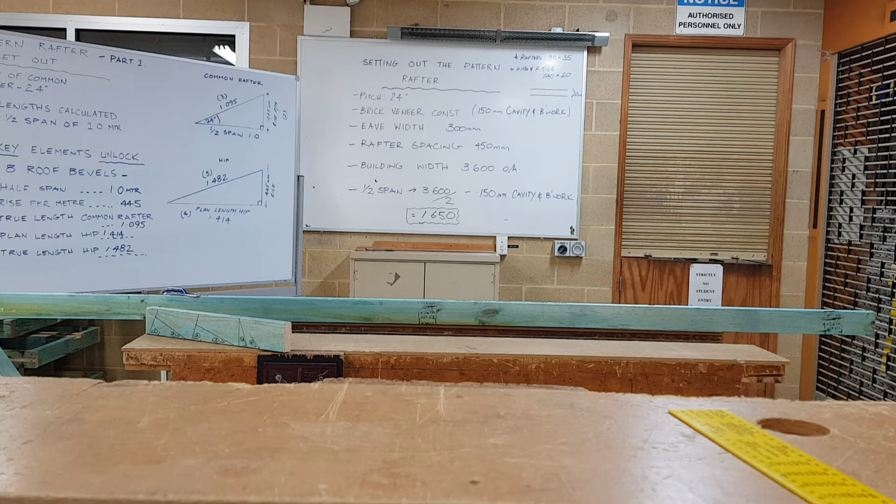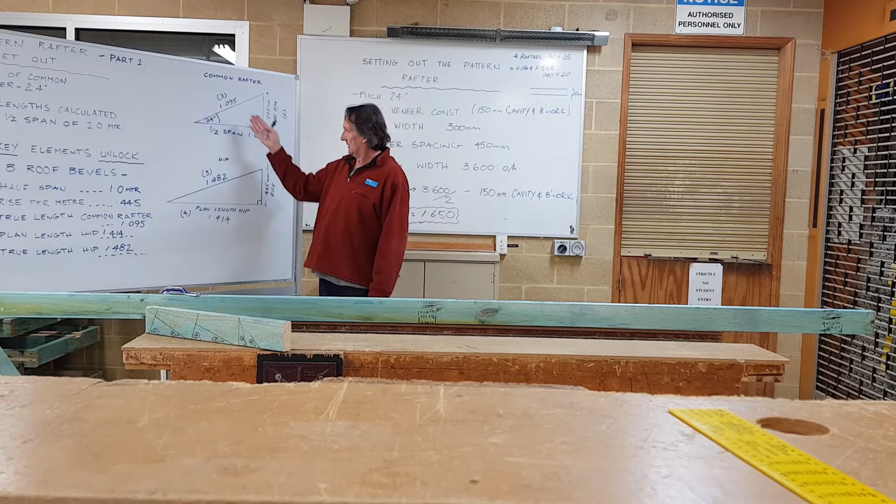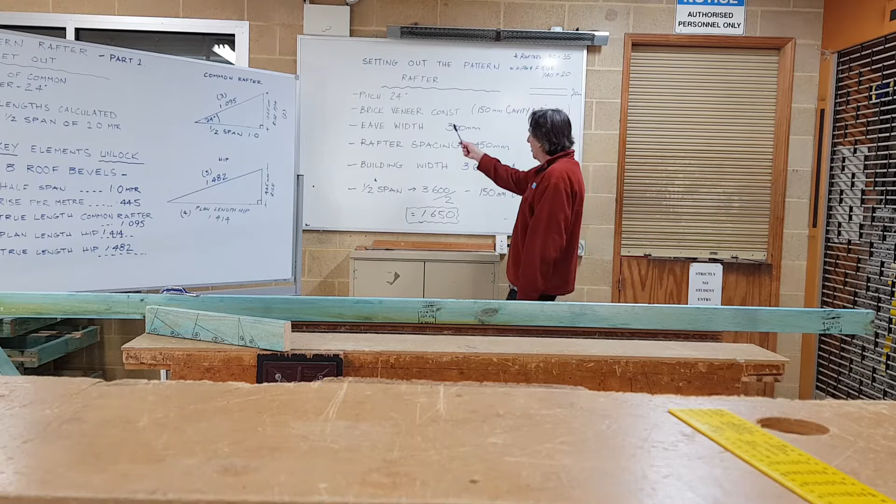We're going to set out the pattern rafter this time, based on our original specification with the 5 key elements, which gave us the 8 bevels. It also gives us the key lengths so that we can actually work out the set out for the pattern rafter. We're going to do it to the specification you can see behind me on the whiteboard. We're going to work to the pitch of 24 degrees as per our original set out.

We're going to deal with brick veneer construction. As you know, that's a 40mm cavity and 110mm brickwork sitting outside the frame. We're going to have an eave width of 300mm. That will be from the outside face of brickwork to the outside of the fascia. We're going to have a rafter spacing of 450. Overall building width, outside face of brickwork to outside face of brickwork, 3.6.

We need to work out the half span in order to start setting out that pattern rafter. So it's going to be the full building width, 3.6 divided by 2, 1800. 1800 less one cavity and brickwork on one side, 150, gives us a half span of 1650 to work this pattern rafter out to. That's what we're going to base it around.

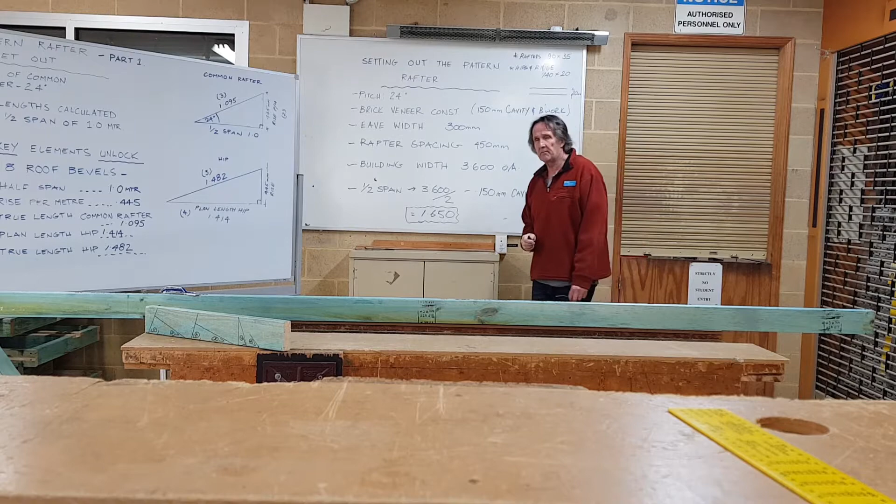We're going to be dealing with rafters in a size of 90 by 35, so our centering rafters, our crown end rafter, any creeper rafters, commons, anything of that nature are all going to be 90 by 35. The hips and ridge, going to make them 140 by 20, just for the purpose of the exercise. They can be anything, of course, but that's what we're going to work to. So you can see here, we've got a pattern rafter, we've got a blank set up, bit of 90 by 35 treated. We've got the bevel block here.

The first thing I'm going to do on the pattern rafter is make sure I'm setting off the spring, the bow up, if you like, in the timber. I'm going to use the bevel block that we set out, and I'm going to come up with plumb bevel common rafter. I'm going to set the bevel to that. Plumb bevel common rafter, there it is. I'm going to come to the end of the timber. I'm going to use a Sharpie to mark this. Right on the end of the timber, from the top corner down, I'm going to show the centre line.

Whenever I do centre line, I put a CL through it because that indicates that it is the centre line detail construction with no members deducted off it. Not half the ridge thickness, not half the centering rafter, nothing yet. That's the centre line location. From that, we want to show the common rafter cut. The common rafter cut would be half the ridge thickness on each pair of rafters on either side of the roof. We can see that the ridge and hip is 20mm thick, so I want to take 10mm off this pattern rafter, and that of course will mean every pair has 10mm off it, allowing for the 20mm thickness.

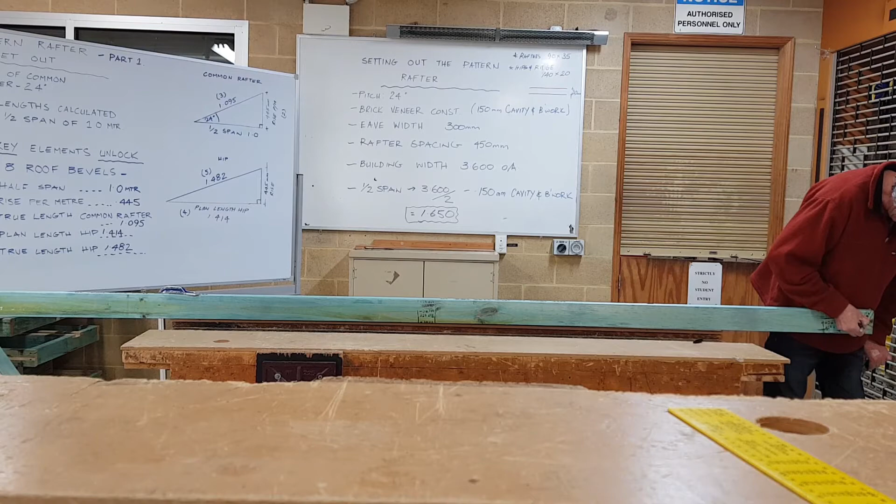So when I measure this, I don't measure it along the gradient or the slope of the roof. I have to measure it square from my original plumb line. So I'm going to go half the ridge thickness, 10mm. I'm going to put my bevel back on there. I'm going to mark that line. I'm going to call that plumb bevel PB common rafter, CR. I'm going to square that line across the top edge.

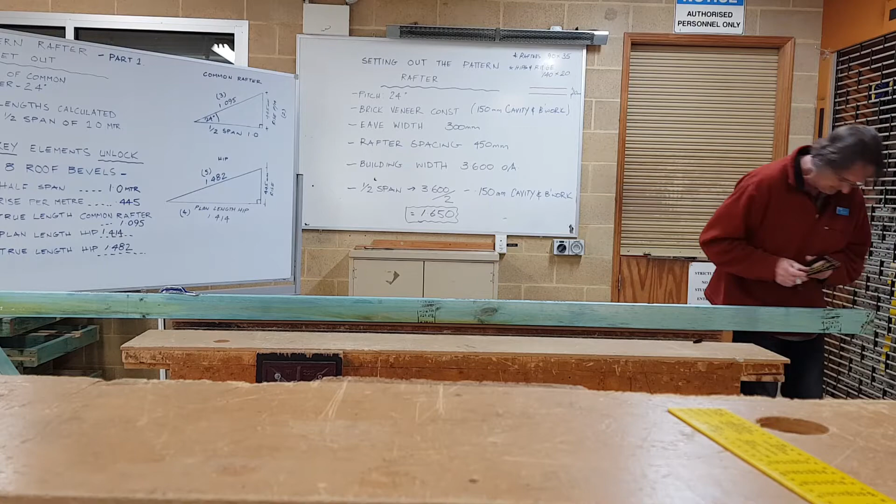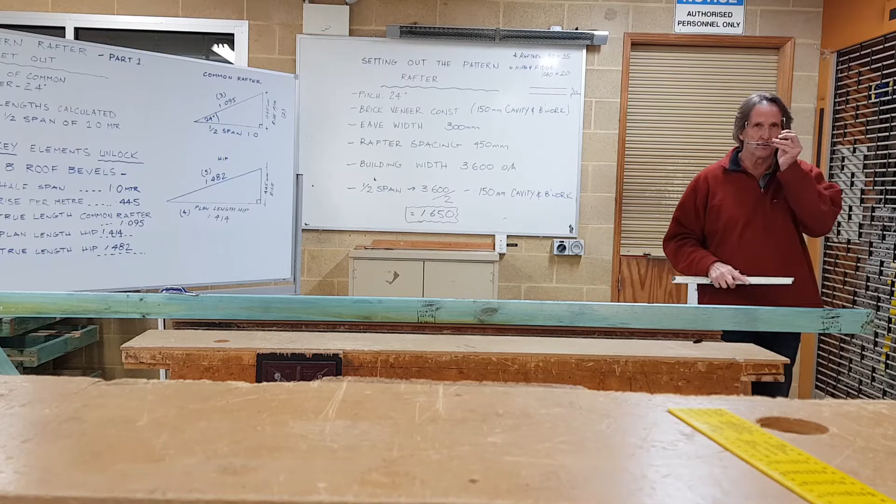Fantastic. I now also want to show the plumb cut for the crown end rafter in the hip roof. Well, the crown end rafter butts to the end of the ridge on the half span, and it is a deduction of half the thickness of the centering rafters, because we're all working to centre line. So half the thickness of the centering rafters, as all rafters are 35mm, 17.5mm need to come off the centre line to show the plumb cut for the crown end rafter, that rafter that braces the roof. So again, measuring from the centre line, back square, I'm going to take 17.5mm off.

10, 15, 16, 17, there it is. I'm going to plumb that line down. We know when I mark that on there now, that line is the centering rafter, C-E-R. Pardon me, crown end rafter, C-E-R. Easy to get confused between your centerings and your crown end as I think about it. That one is your crown end rafter. There it is. We square that across the top.

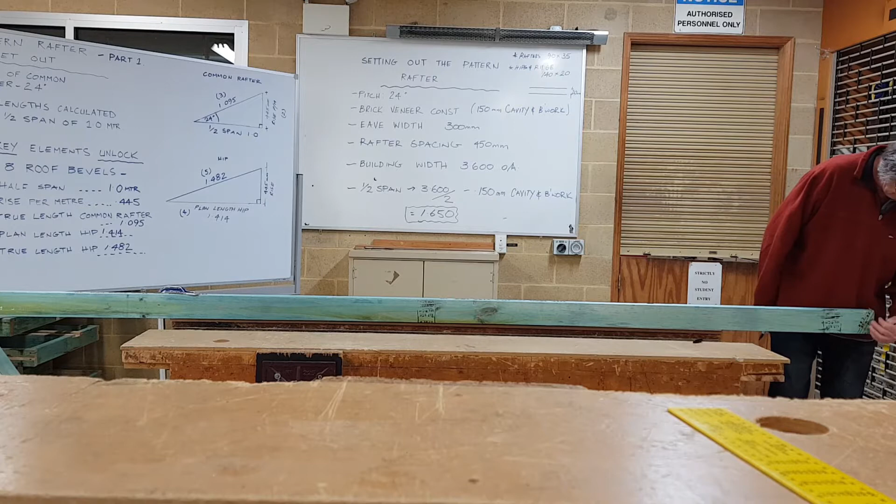Now we have the three key set out points for the pattern rafter. We've got the centerline detail, we've got the plumb cut for the centering rafters, and we've got the plumb cut for the crown end rafter. All clearly shown. What I need to do now is show the location of the set out length for the bird's mouth on this pattern rafter. So that's what I'm going to do next. And that's really very, very simple.

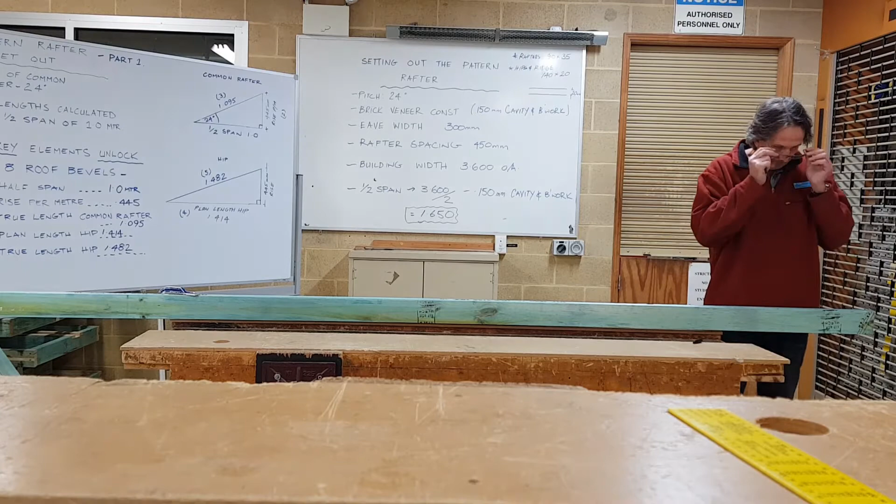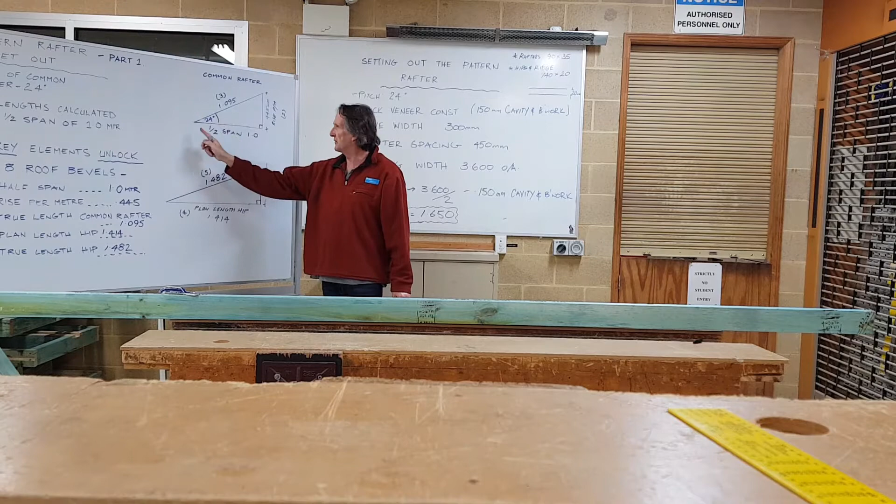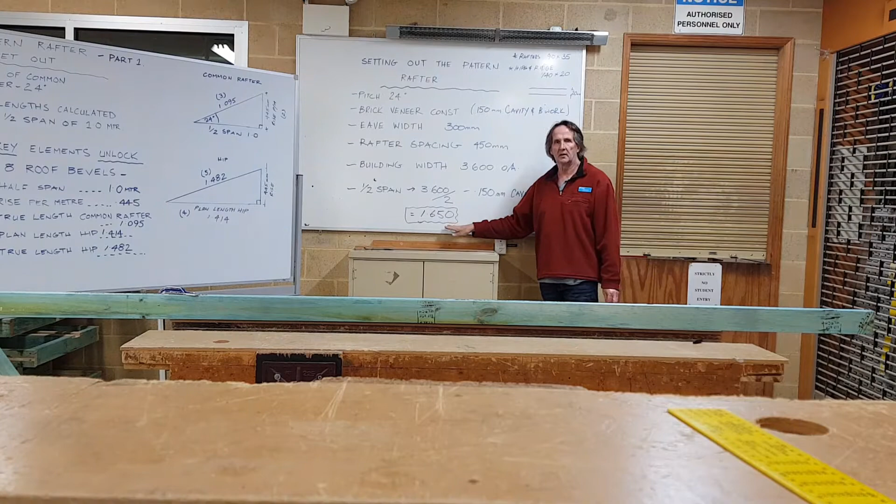Because we originally worked out that our true length per metre was 1.095 metre on a 24-degree pitch for every metre of run in the half span. Well, I know my half span is 1650. That's what we worked out a moment ago. So if I multiply my flat half span of 1650 by the measurement per metre of 1.095 metre, that will give me a direct measurement down the pattern rafter to the upstand or location of the bird's mouth.

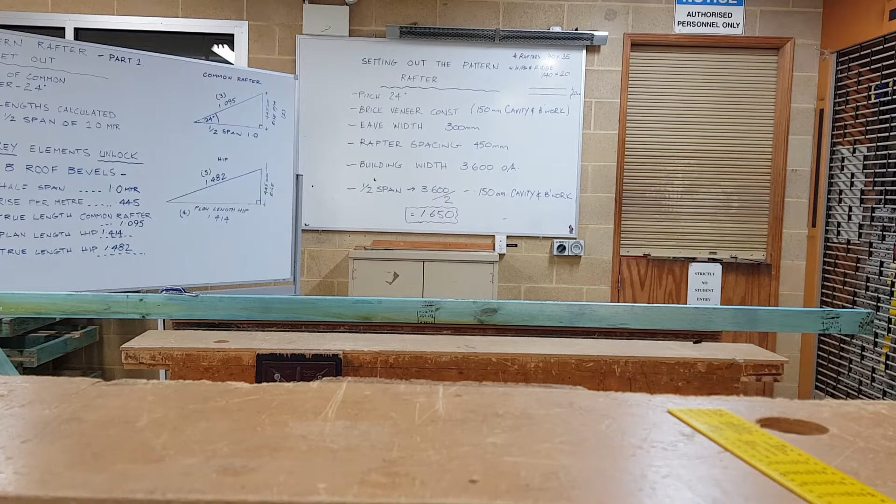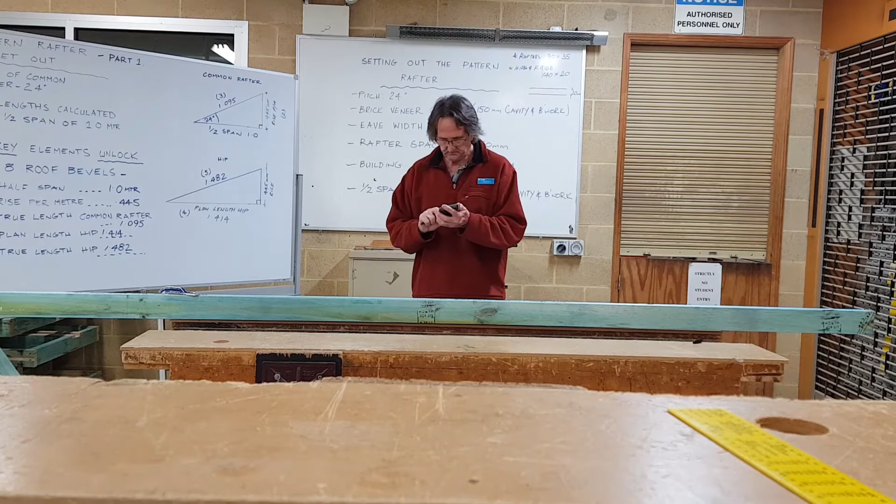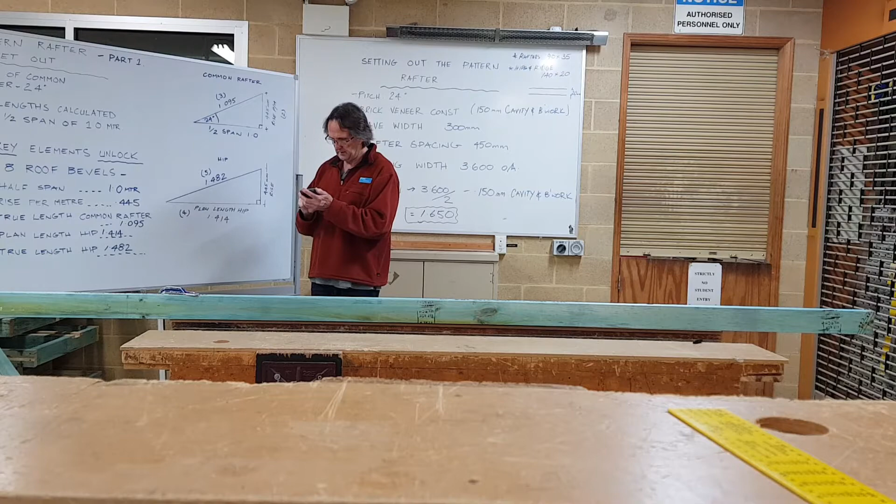So as I said, the half span, 1.650, multiplied by our true length of common rafter per metre on a 24-degree pitch, times 1.095, equals 1.807 metre. 1.807 metre. So I can hook my tape on the end of the timber, because that's where I set the centre line up from, and I can measure down that rafter 1.807 metre, and I can put a mark there, a little mark on the top of the timber.

On that mark, I'm going to put my 24-degree plumb line. I'm just going to check again on the bevel block, it hasn't moved. Yep, pretty good. Whoop, it's a bit too long, it's hitting the bench. Just slide it back up, recheck it again. Put it on my mark of 1.807 metre and draw a line in there. That represents the location of the outside of the frame on the half span.

Now I need to show the bird's mouth. The key thing about the bird's mouth is to measure the remaining amount of material left on once you've made the bird's mouth cut. It's called the upstand. On a 90 by 35 or a 90 by 45, something like that, a 75 to 80 mil upstand is the right size. I measure from the top of the rafter down the amount of material left on. The amount on the upstand is the important part.

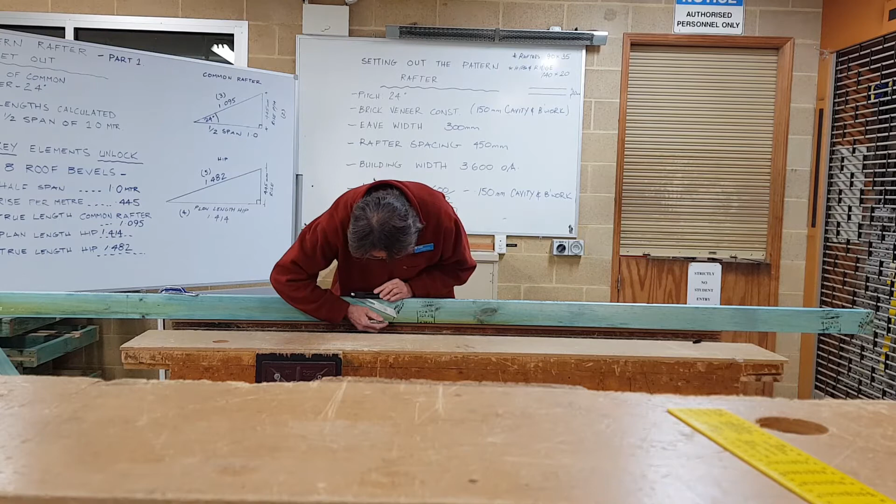So I'll put my bevel on there, I'll swing it around and set it for the angle of the level bevel. Here we go. Put it on, top edge, line it up down there, carry that distance through... of bird's mouth. Key part being the upstand is left on. That's fantastic.

So, bit of a revision. What have we got so far? We've got the centre line plumb cut. We've got the half ridge reduction of 10 millimetres, and then we've plumbed that down for the plumb bevel centering rafter. From the centre line, we've also marked half the thickness of a common rafter, or the centering rafter, for the crown end. 17.5 mil, we've marked that. We've squared those two across the edge of the timber.

Then we've said, okay, now we need the centre line set out length to the upstand bird's mouth, so we can make that cut as accurately as possible. So we've taken the half span of the job, 1650.

Once we've taken our 150 millimetres off half the overall width, and we've multiplied that length by our true length per metre, 1.095 multiplied by the half span, that gave us 1 metre 807. I've then hooked a tape on, 1 metre 807. I've laid it across the top on the pump up.

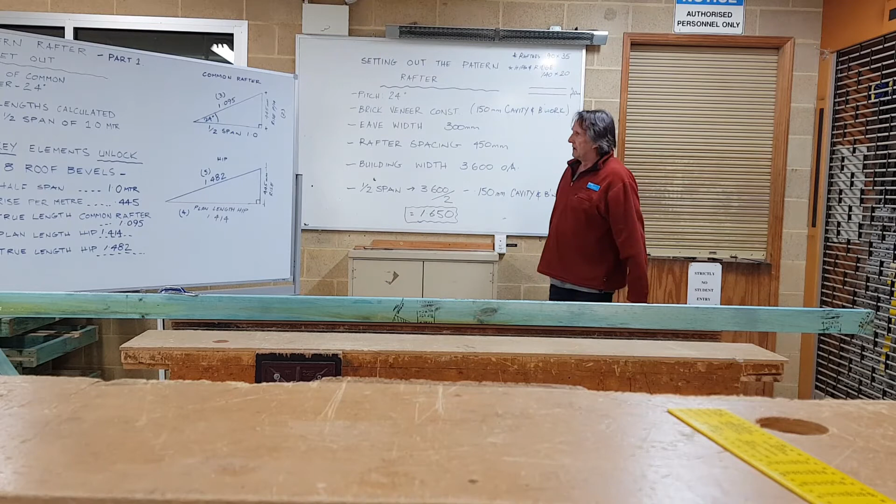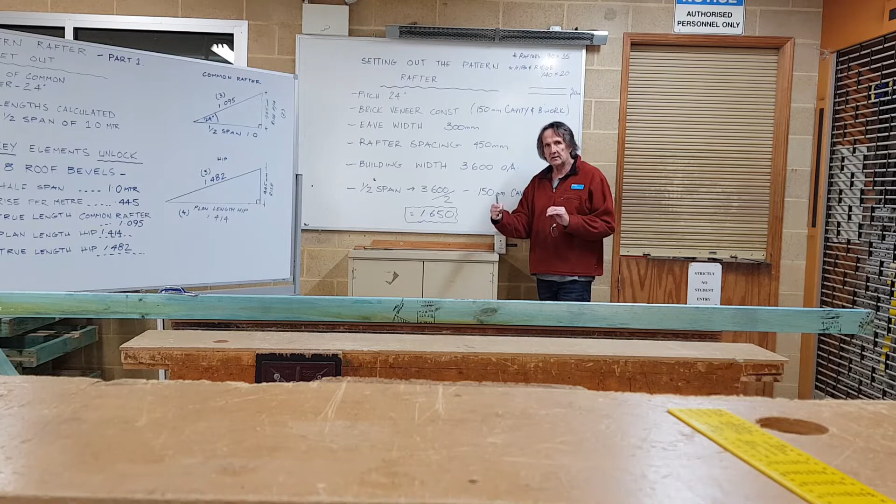I can take my 1650, which is from the apex point to the bird's mouth. I can then add the 300 horizontal eave overhang plus the cavity in the brickwork back on, because the upstand of 1650 is only to the bird's mouth, the half span. I can add it back on and then multiply that by the true length per metre to give me the length of the eave cut. So I might do that just to make it simple.

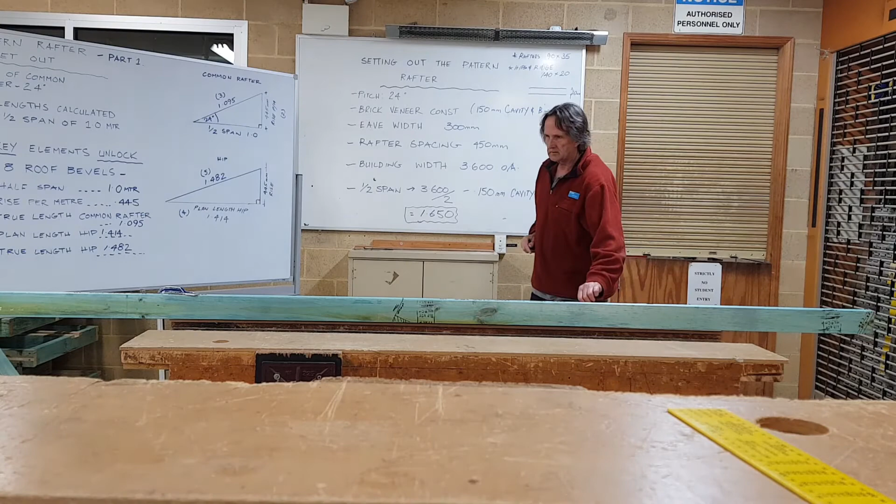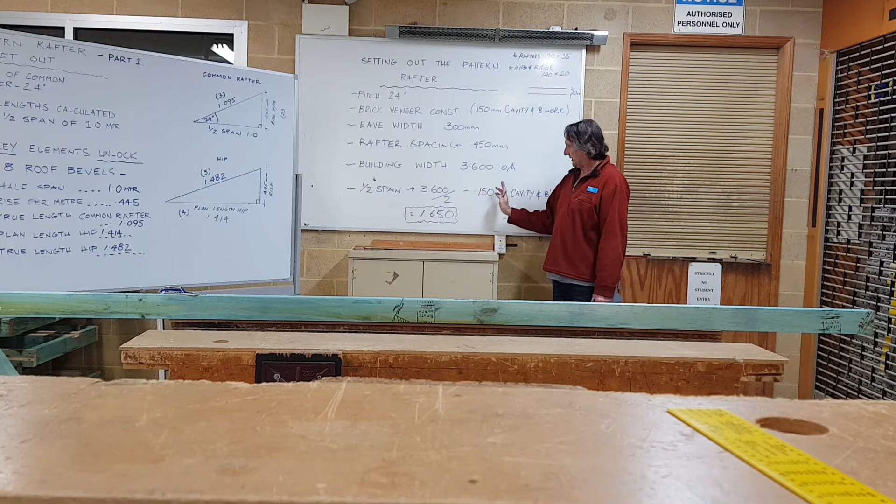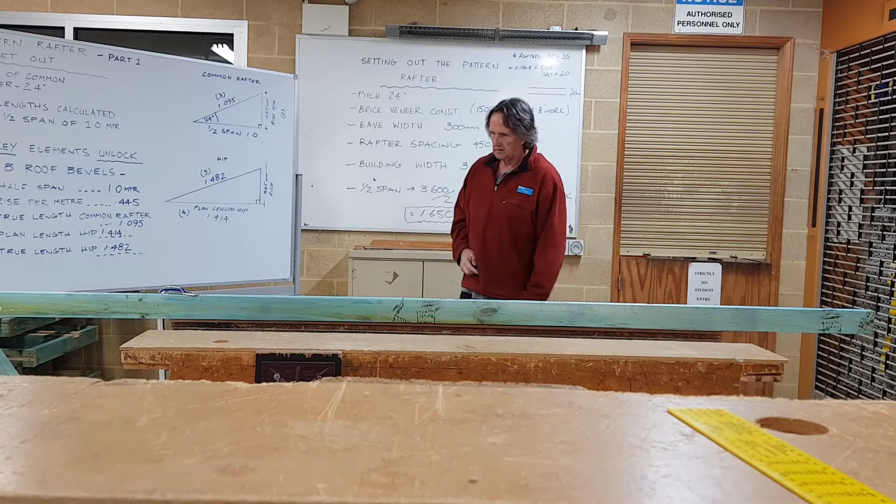The half span, 1650, I'm going to add the 300 eave overhang back on, 1950, and I'm also going to add on the 40 mil cavity and the 110 brickwork, giving us another 150 mil to give us 2 metres 100. Cool. 2 metres 100 is the plan length, 2 metres 100 multiplied by the true length per metre, 1.095, equals 2 metres 300 on the pump up length, 2 metres 300 centre line.

So I can put my tape on, I can go 2 metres 300, I can put a mark there, I can go back to my bevel block, I can get the plumb bevel again off my bevel block. That would be the plumb cut for the eave overhang. And then I need to take 20 mil off that for the fascia, because remember, the eave overhang is 300 to the front edge of the fascia.

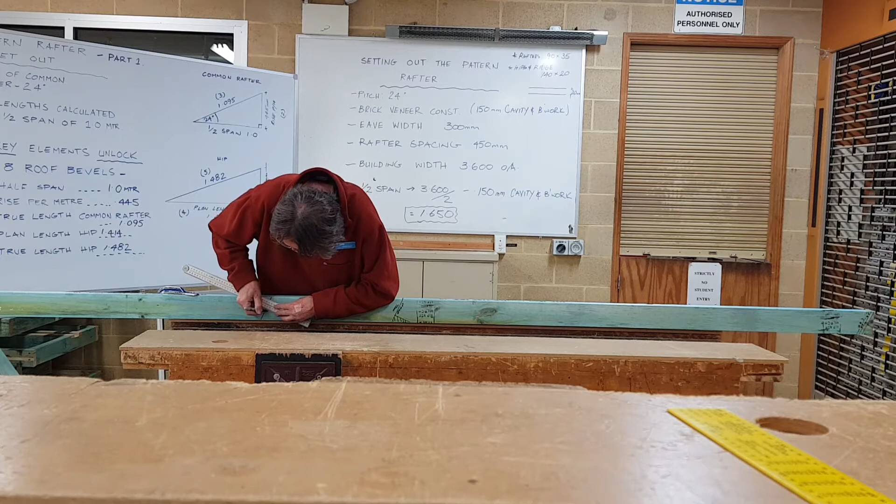So measuring 20 mil square off that mark and popping my bevel back on, I can actually indicate the tail eave cut. There it is. Square that across the top. And of course I can check that. And the easy way to check that I've got that correct is that I know the eave is 300.

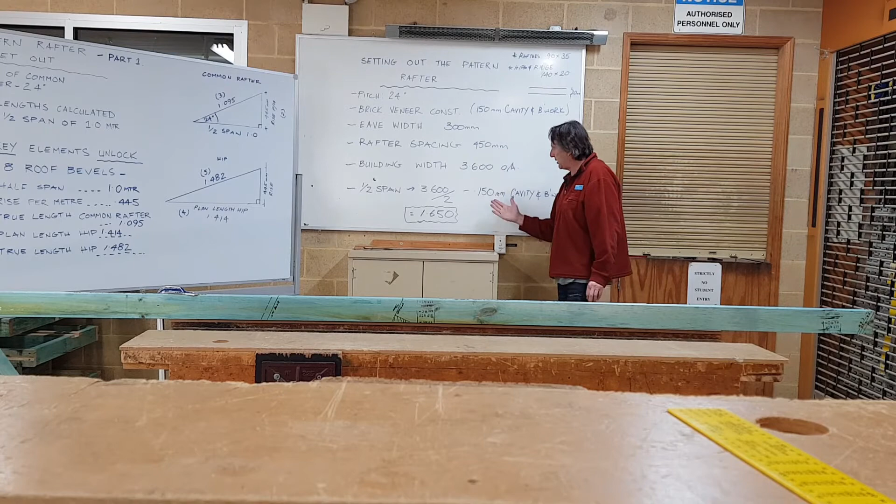I know that I'm adding 150 to it to take up the brickwork and the cavity, so that would be 450, 300 plus 150 is 450 as a horizontal plan measurement. If I multiply 450 by my 1.095, that tells me the pump up measurement or the raking measurement should be 493. So if I've done it correctly, from there to there, I should have 493. Boom, 493, right on the money, and then 20 mil off for the eave. Perfect. So that's great.

Okay, the next thing we can do while we're here now is the first creeper. And the first creeper is 450 off the centre line, down. 450, that's a plan measurement. In order to find out the raking measurement down the rafter, I'm going to multiply my spacing, 450, as I did a moment ago, by 1.095. And that equals, as I said a moment ago, 493. So I can hook my tape on, I can put a light mark at 493.

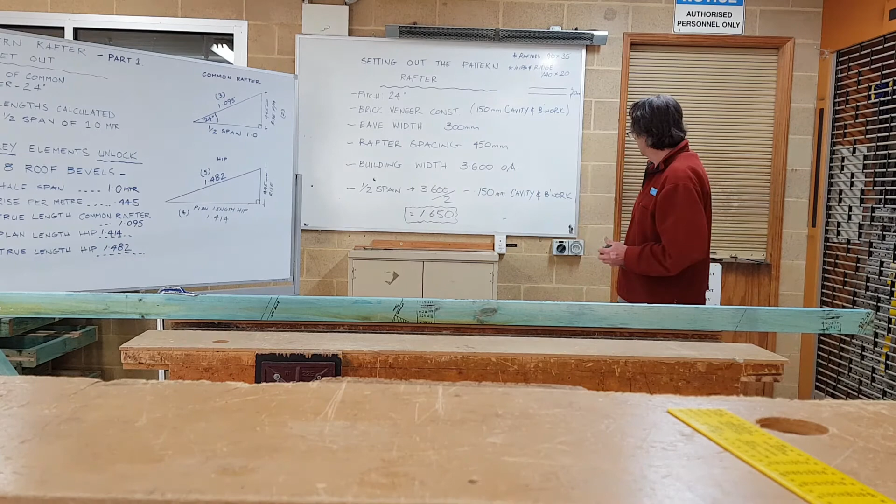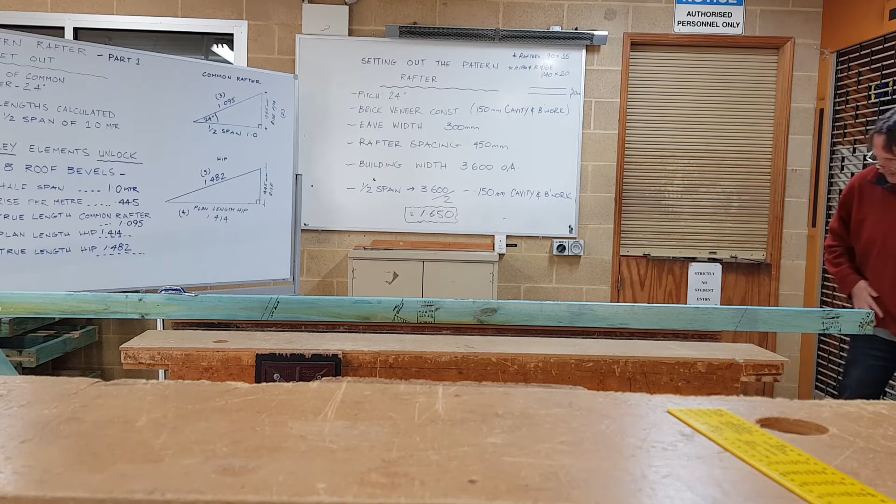So I said I have to take off half the mitre thickness of the hip. I've got a bit of hip there, drawn, showing the edge of 20 mil. And I want to know what the full mitre thickness is of that piece of hip. I've just lost my marker. There it is.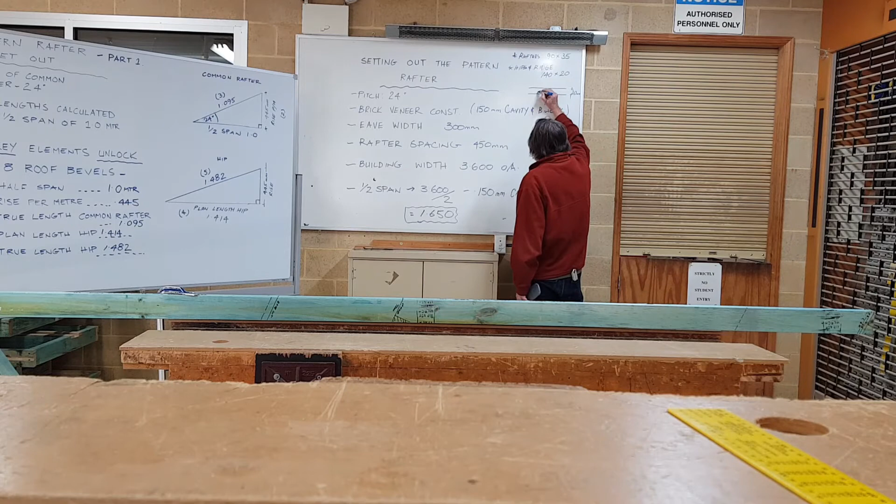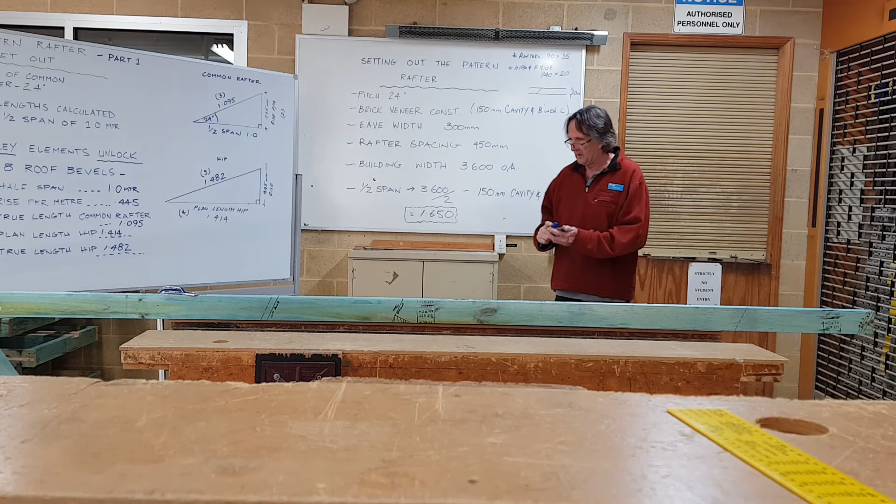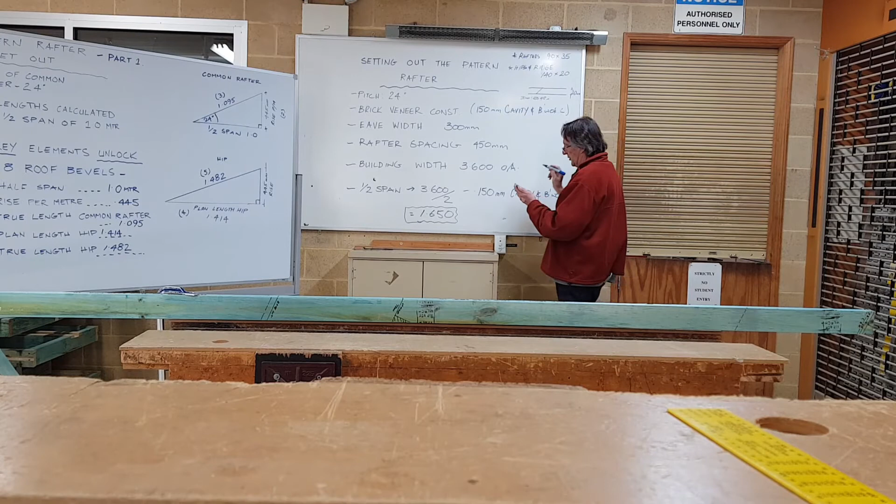The mitre thickness. What that means is, if I put a mitre on there at 45 degrees, what is the full length of that line? That's a mitre line from one side to the other. Well, I know it's 20 mil thick, and I know a mitre is at 45 degrees. So I can say 20 mil divided by cos 45 will tell me how long that mitre line is. 20 mil divided by cos 45 degrees equals 28.3 millimetres.

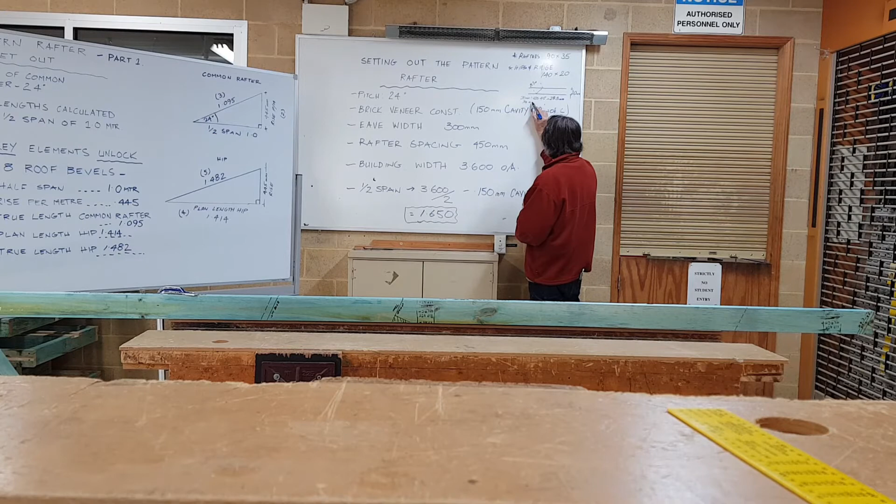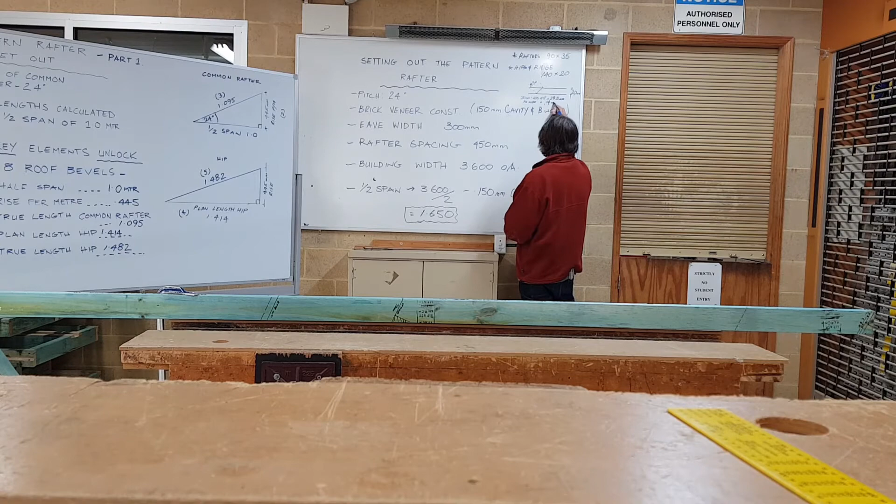That full length of line there is exactly that, 28.3 millimetres. Well, what I want is half the mitre thickness. So you have to divide that by 2. And that's 14 millimetres, close enough. 14 millimetres is half the plan mitre thickness.

So from that first long point creeper, I want to measure back 14 millimetres. That's exactly what we're going to do. 14 millimetres, 10, 15, 14. I put a little mark there. That's half a mitre thickness off.

Now from that line, I want to add half the thickness of a rafter back on. Half the thickness of a rafter, my rafters are 35, half that thickness is 17.5. So from that line forward, I want to add 17.5 mil back on. I'm going to line that up on 100, 0, 200 there. Go 15, 16, there's 17.5. I'm going to mark that line all the way up. That is the long point of my first creeper.

There we go. I'm going to square that across the edge. That will indicate to the apprentice, when I pass this to the apprentice to set out all the rafters, that's the long point of the first creeper. These others are just my set out marks.

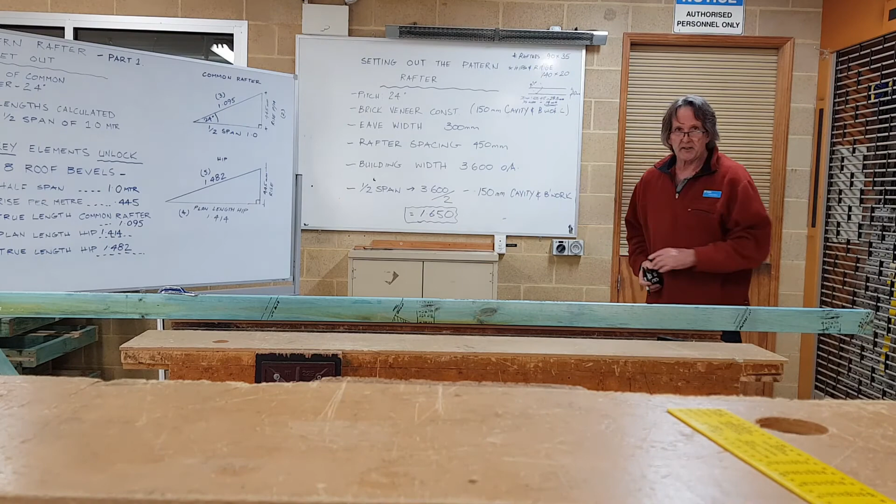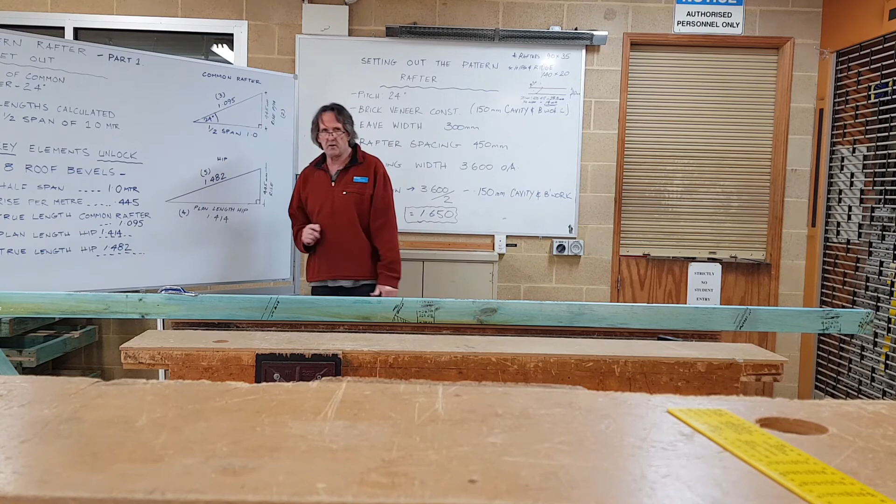Fantastic. Now from that point, I can do all my creepers at 493 spacing, because they're at 450 in plan length. And I know 450 in the plan multiplied by the pump up measurement of 1.095 turns 450 from plan into a direct measurement down the rafter of 493. So I'm going to hook my tape on there. I'll hold it on 100, I'll go 4, in fact what I'll do, I'll go 493.

I'm going to hook my tape over, measure to that line, which is 487, just to that line there, and then I'm going to add 493 to it so I can get a progressive measurement. So 487 plus my creeper spacing for the second creeper of 493, 980 millimetres. I'm going to put 980 millimetres as a mark there. That's a long point of the second creeper.

Then I want to go another 493. 980 plus 493 equals 1473. So now I'm going to put a mark at 1473. There it is. These are the progressive measurements that we've done before when we did stair string set out. It's pretty much the same sort of process.

1473 plus the next creeper, 493 further on, 1966. 1966 is right there. We've gone past the upstand and we're almost near the tail on the eave. Will I get another creeper in there? No, I won't. So that would be the last one. That's great. So now I can pick up my plumb bevel.